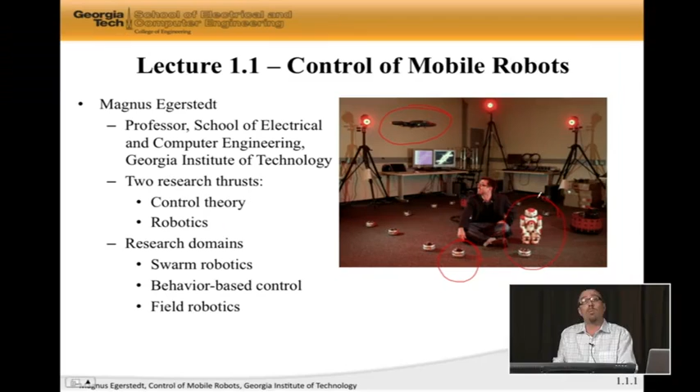Up here in the air is a quadrotor, and these robots have to be controlled in a different way, but we're going to learn how to do this as well. And right here is a little bipedal walking humanoid robot. All of these robots will show up physically in the class throughout the various modules and lectures.

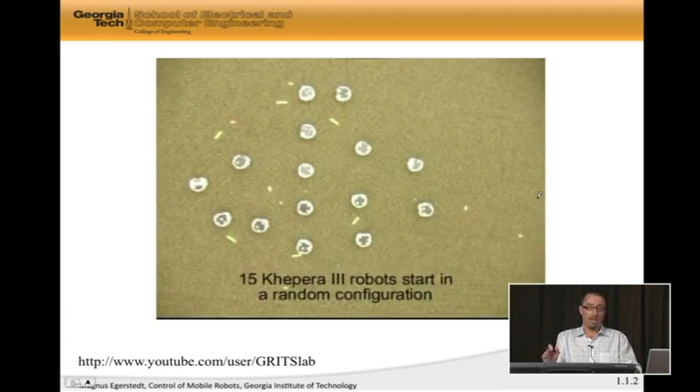Here is an example of what I do, and the reason I'm showing this video is because a lot of what we're going to learn in the class is present here. In this case you have 15 mobile robots on the ground, and they have to together solve a coordinated control problem. What they have to do is spell GRITS, because I'm the director of the GRITS lab, which stands for the Georgia Robotics and Intelligent Systems Lab.

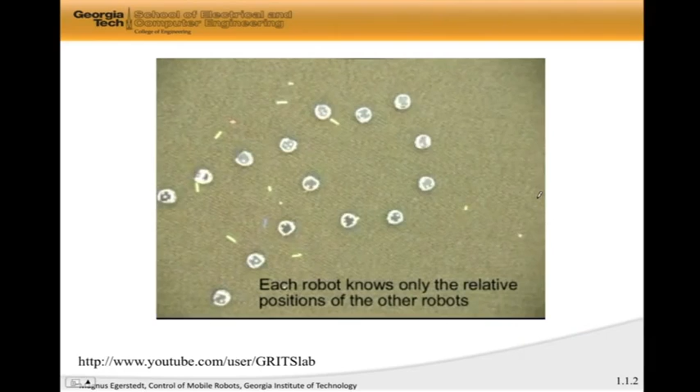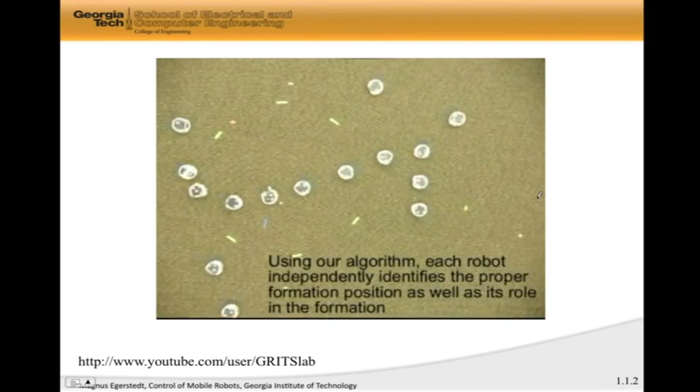But talking about the robots here, what they need to do is use the information available to them and come up with control strategies based on that. In this case, they have to figure out where they should go in these particular formations, how they should go there. They also need to deal with the fact that the robot models, the dynamics of these little guys, are surprisingly complicated, and you should not slam into each other.

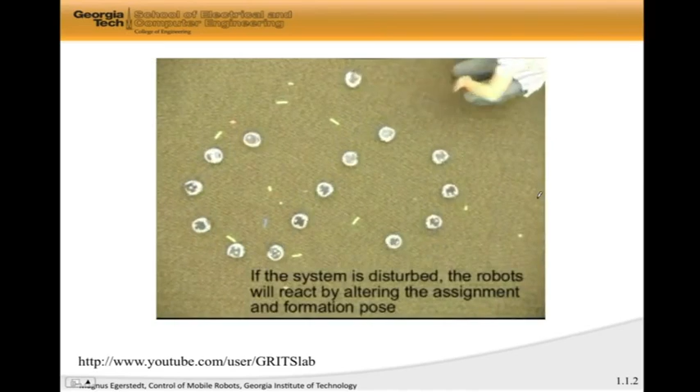You should also be able to survive disturbances. So Ted here, who's a former master student in the lab, is actually messing with the system, and the controllers have to be able to overcome these disturbances and actually be robust to what's going on.

Having said that, what we are going to do in the course is develop control theory, which is this general mathematical framework for making systems do useful things. Then we're going to take robotics as the main application domain, and we're going to couple robot models and robot problems to what we develop on the control theory side. That's going to result in a number of different mobility controllers. We're also going to discuss a plethora of different application domains found in robotics where our controllers are useful.

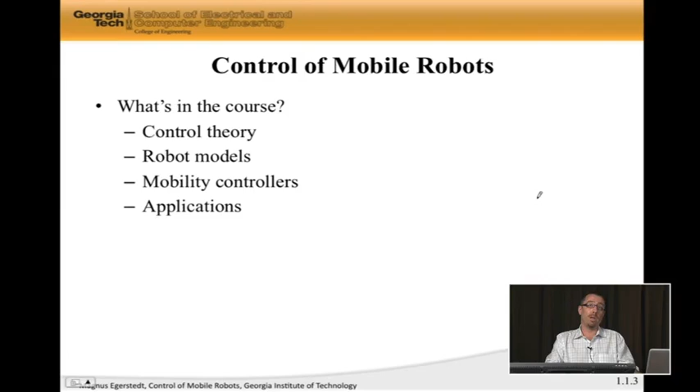I do want to point out, which is almost as useful, what's not in the course. This course is not a course on AI, in the sense that the robots aren't going to reason at a high level about where they should be going. Instead, someone has told the robot where it should be going, and it's our job to make it go there.

It's also not going to be a course on perception, in the sense that we're going to assume that the measurements we get are already reasonably good, and they tell us roughly what it is that we are interested in and need to know. We're also not dealing very much with the actual design of robots. A clever mechanical engineer has already built it for us, and it's our job to make this design do what it is that we want it to do.

So in robotics, typically, people talk about the sense, plan, act paradigm, where sensing is the perception side, the planning is the AI side, and the acting is the control side. This course falls squarely into the act domain.

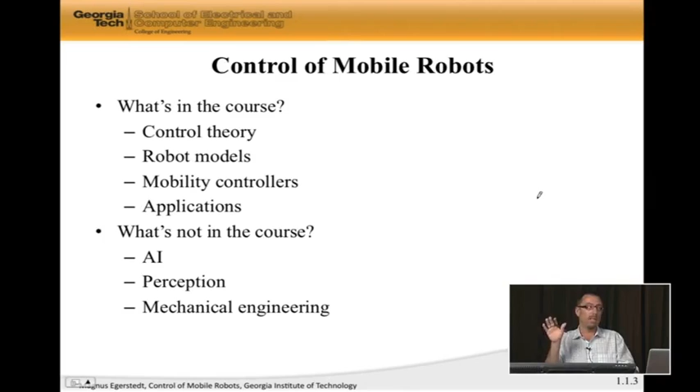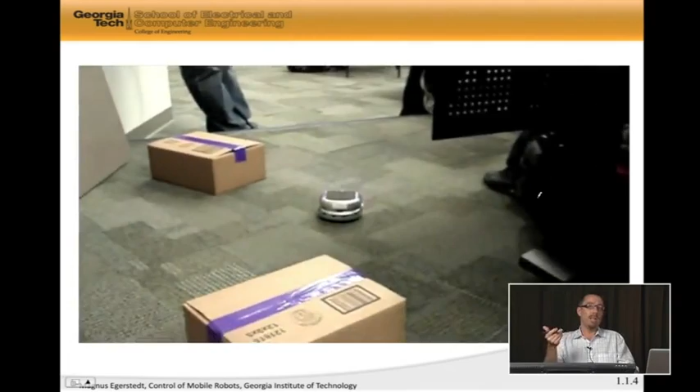And I want to end with showing a rather amusing video. This is a course that I taught on campus at Georgia Tech, where part of the course was to design controllers, very rudimentary controllers, for making these robots go to goals without actually running into obstacles. We had students actually compete, not at the AI level or the perception level, but purely on the controls level, to achieve certain tasks.

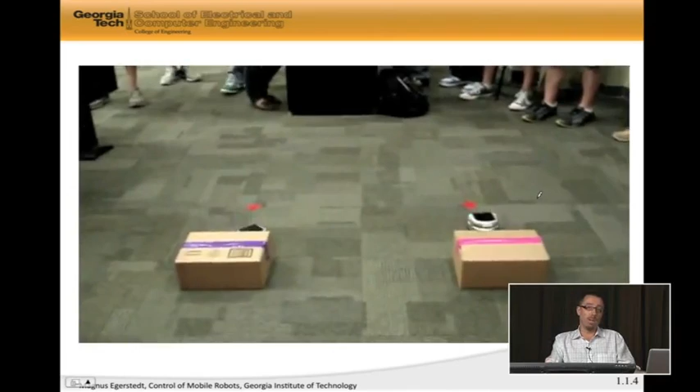So here you see, for instance, one robot that's a little too aggressive. It's also oscillating, so there's something not perfect with this control design. It's also a little fast. The robot over on the left oscillates less, but it's a little bit slower.

Here we have another example of two other teams that are now competing against each other. You will see that one robot is, again, a little over-aggressive, the one on the right. In fact, it's going to be so aggressive that it loses track of what it is that it's doing. So this would be an example of a maybe not so successful control design.

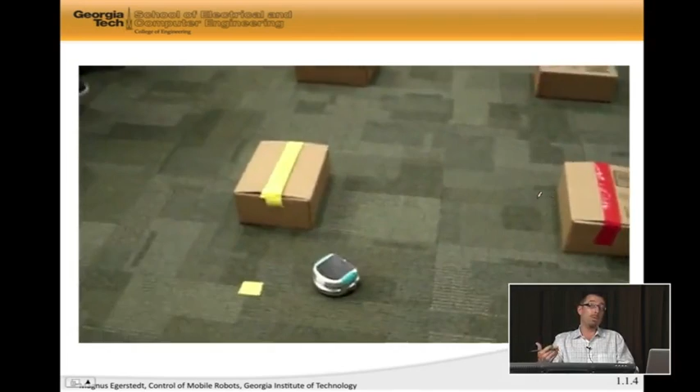We will do this in this course. Now, I realize that I can't ship one of these robots to every one of you. So instead, we're going to do this in the studio. And we're going to together develop the control algorithms that results in, this would be the final race in this class. Take a look at Team Purple.

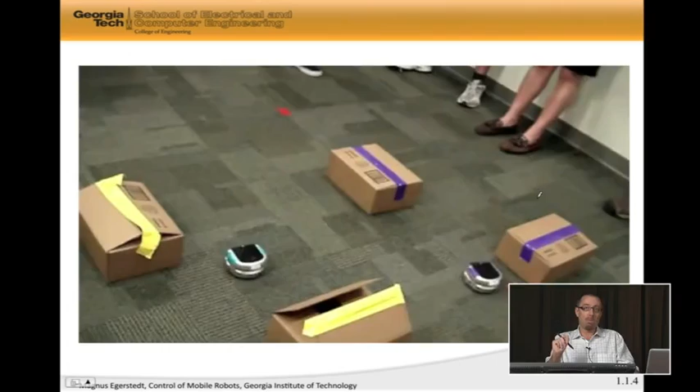This controller is awesome. It's very deliberate. It oscillates very little. There is very little overshoot. It's moving fast. And what's going on there is just a small and slightly more informed control design. So Team Purple won in this case.

And with that, I would like to conclude this first introductory lecture to the course.